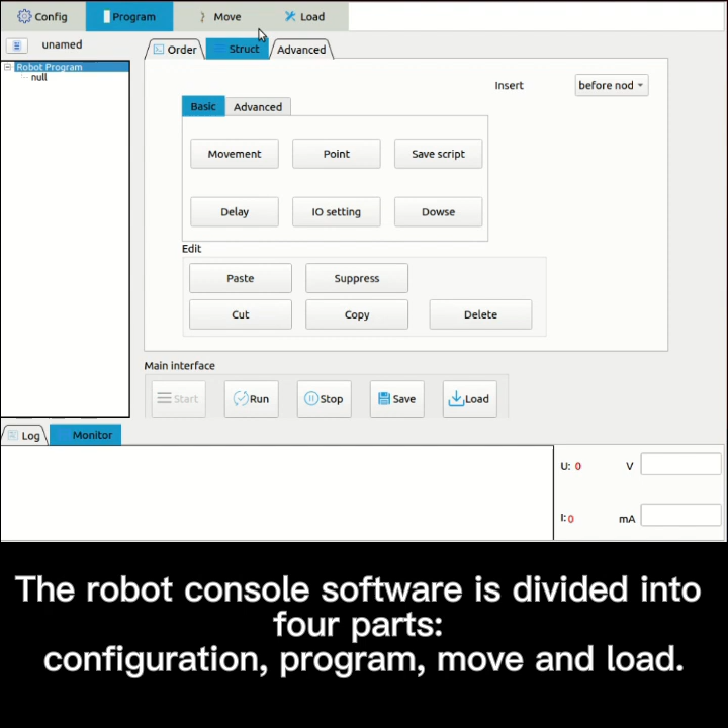The robot console software is divided into 4 parts: configuration, program, move, and load.

In the configuration part, the configuration box contains startup, developer setting, and functions. At the bottom, you can see log and monitor, and the real-time current and voltage display. This bottom part will appear in the other 3 boxes as well.

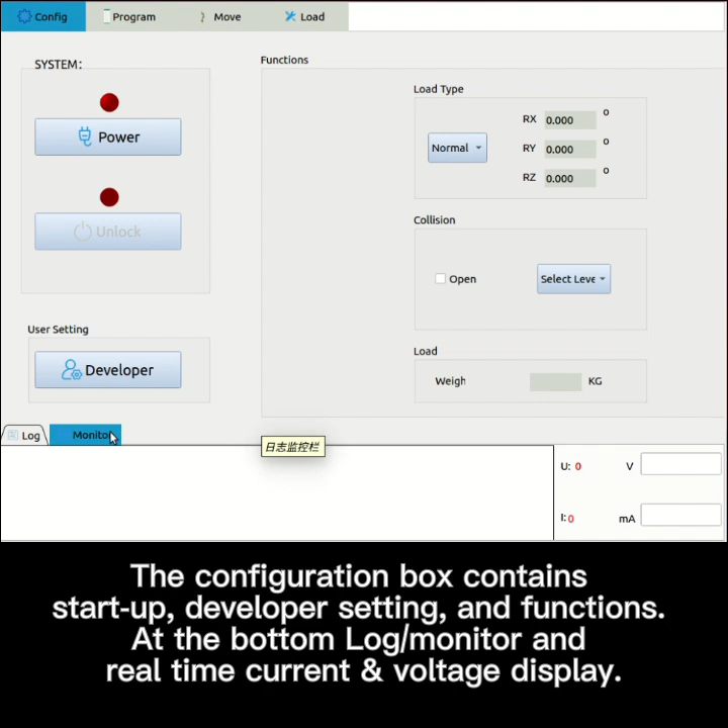To start the robot, just click power and wait until the light turns green. Then you can also see at the right the data will change, and then unlock. The robot is on when you see both lights are green.

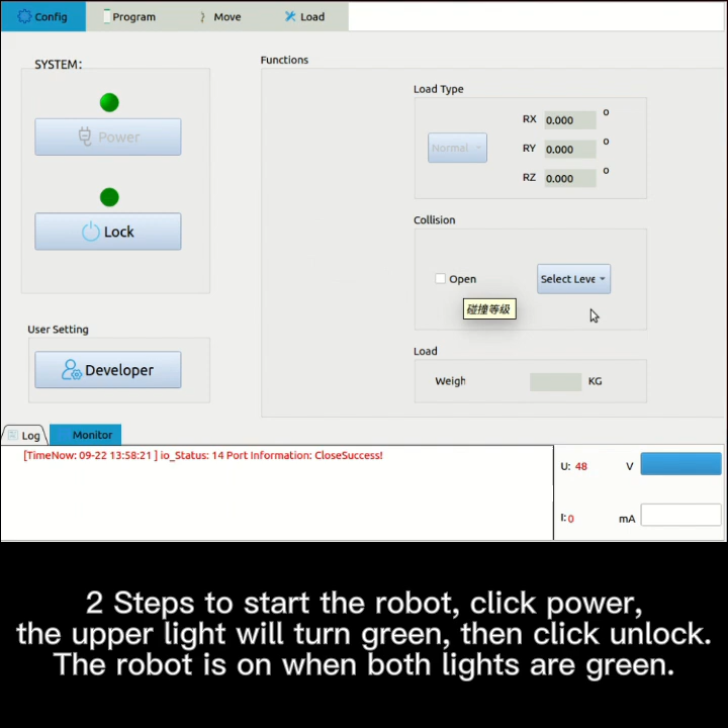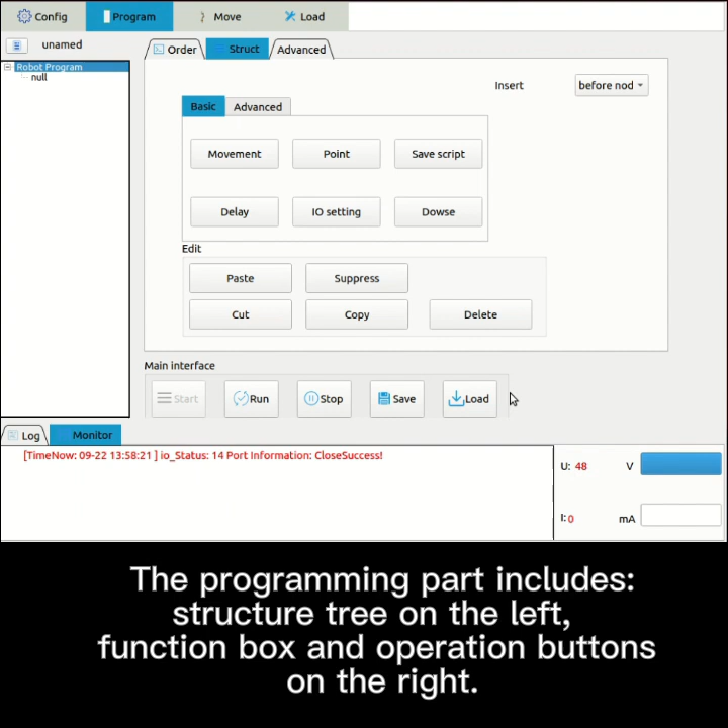The programming part includes 2 parts. The bottom part, and mainly the upper part, also divided into 3, including the structure tree on the left, the function box, and operation buttons under the function box. You can see in the function box there are order, structure, and advanced boxes. In the advanced box, you can import and run scripts and also stop or clear scripts.

If you want to program a robot joint movement, click the left part. Then go to the right part, click struct. And you will see it will turn to instruction. Only click movement, then a point will be added automatically. If you want to add more, just click joint again.

For individual programming, you can change or choose movement. There are move J, L, and P. Also, you can select the coordinate here.

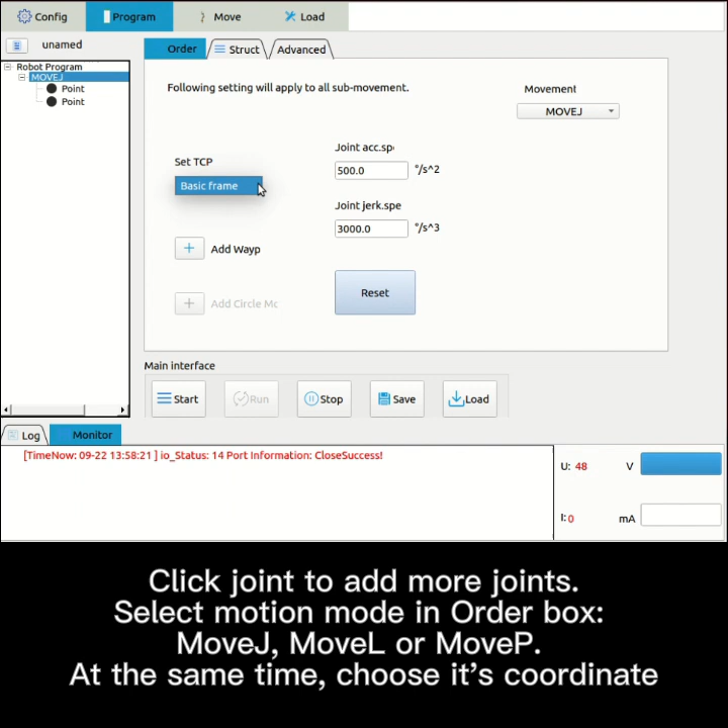Now for an individual point, select a point and choose set waypoint, and you will enter the move box. Use the arrows to program the movement of your robot. After you're done, simply click confirm, and you will save the program. Return to the program box.

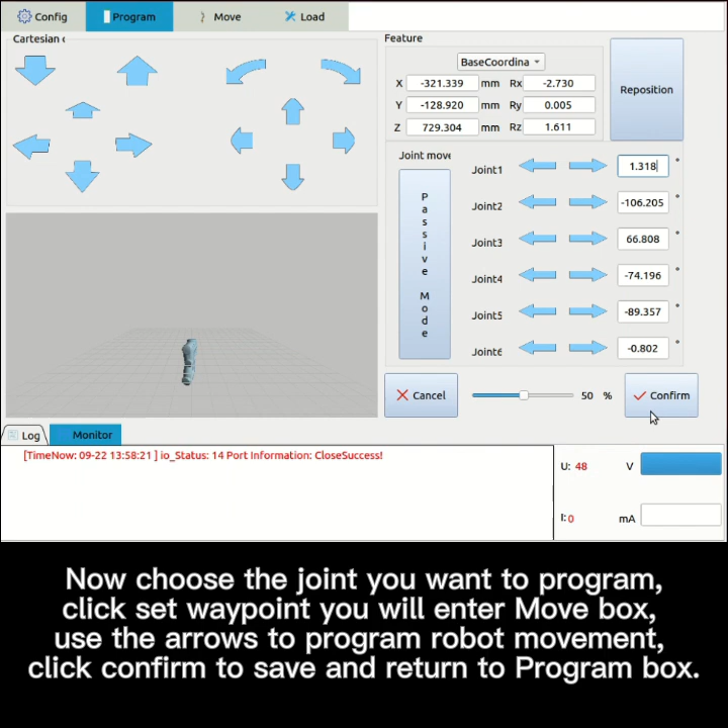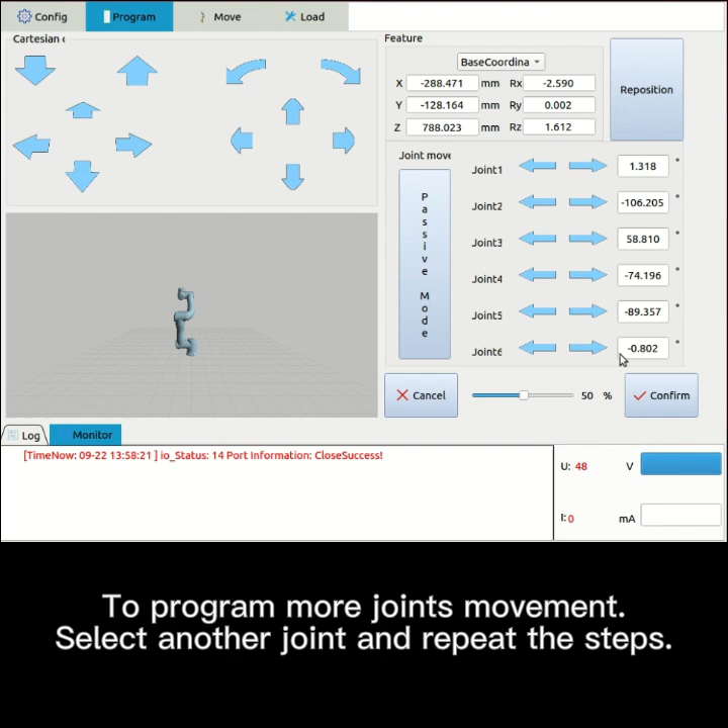To set another movement, select another joint and repeat the above steps, and also choose different arrows to change the movement. Click confirm. If you want to view the movement that you programmed, click here, move to this, tick. Go to start, click OK, then click run, choose yes.

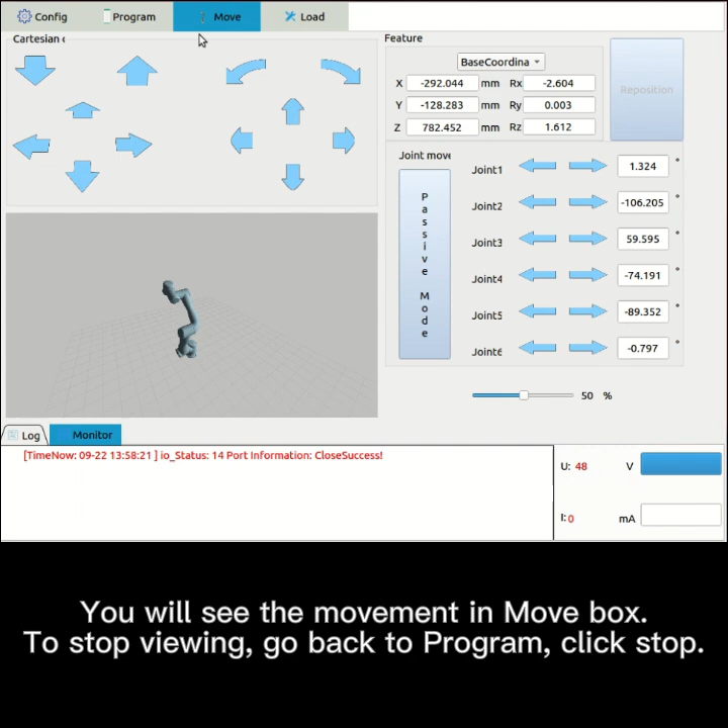Now go to move. You will see the movement in the display screen in the move box. If you want to stop the viewing, just go back to program and click stop.

Now let's take a look at the move box. It includes the Cartesian coordinate system on the upper left part, 12 arrows on the right, the reposition button, passive move, and also the speed control bar. Here is the display screen. You can see the movement of the robot arm.

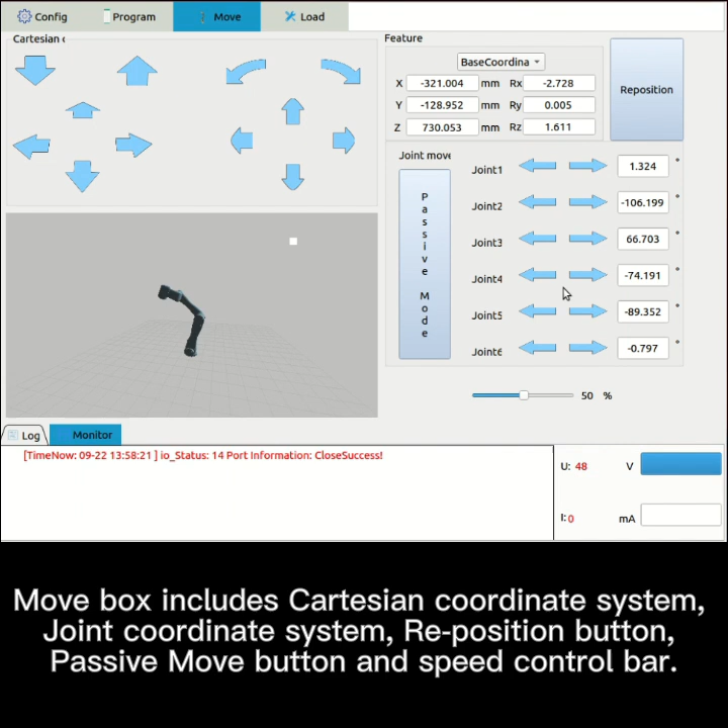Of the 12 arrows, each 2 of them control one joint of the robot arm. You can simply click and change the movement of the robot arm. And the speed bar here: the higher it goes, the faster it will be. The lower the percentage, the slower the movement will be.

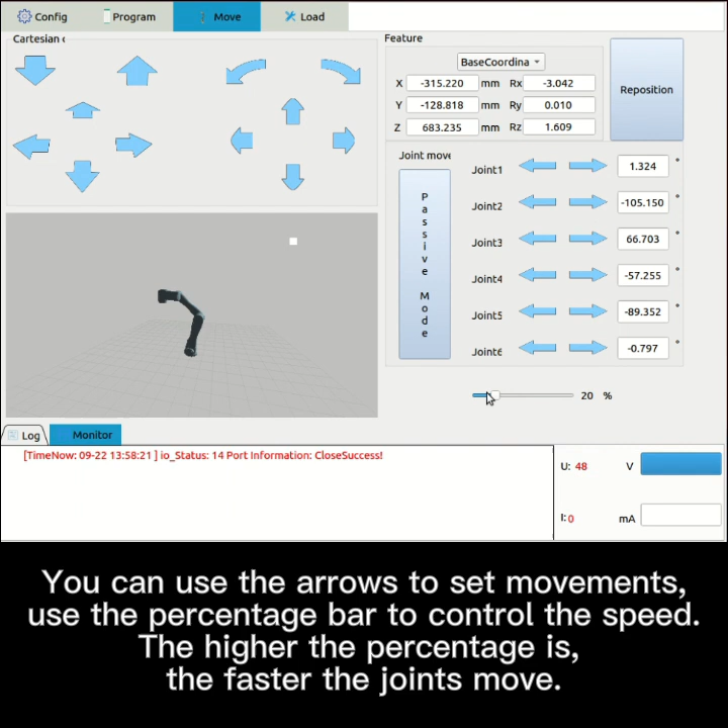On the left top part, the first 6 arrows are one group. Click different axes, X, Y, and Z, and the robot arm will move accordingly. You can see the data change as well on the right part next to the reposition button.

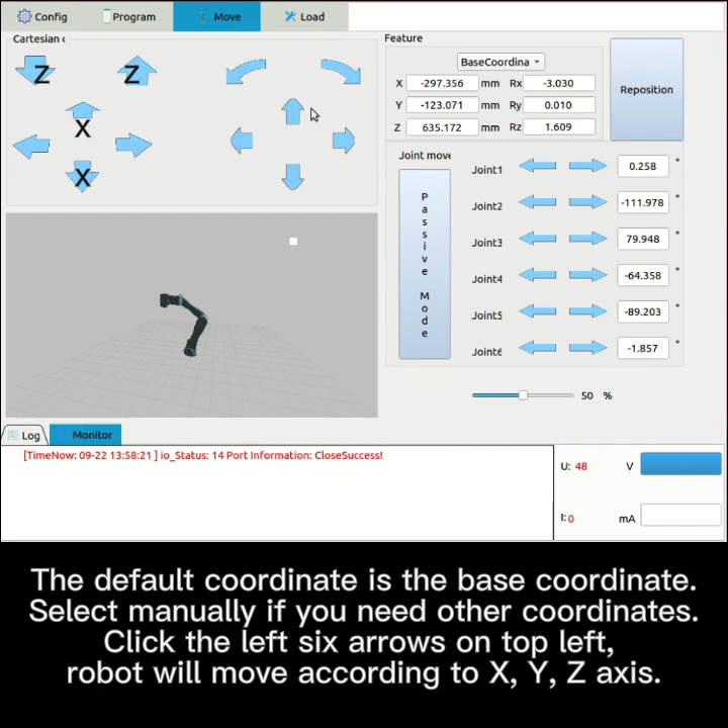And the other 6 arrows on the right are also used to control the robot arm, but if you click these 6 arrows, the robot will rotate instead of just move. It will rotate according to the coordinate.

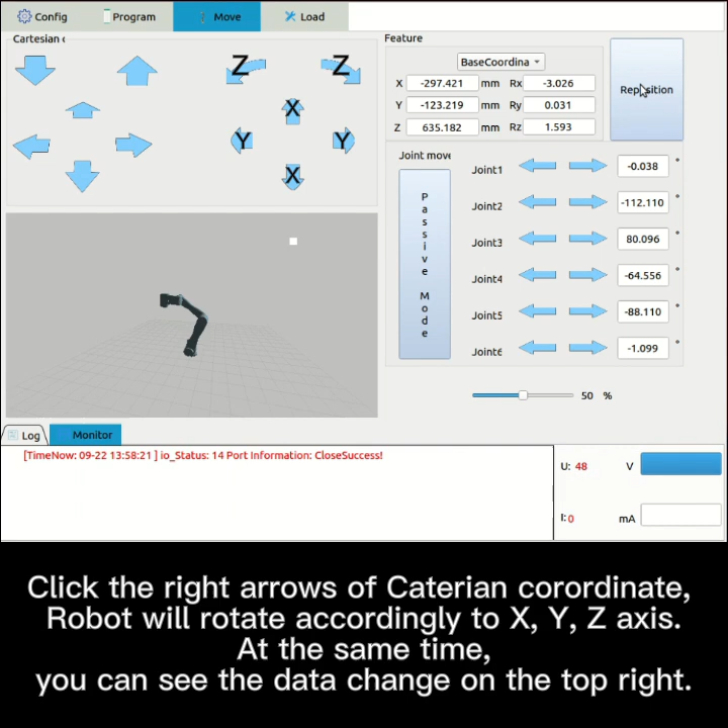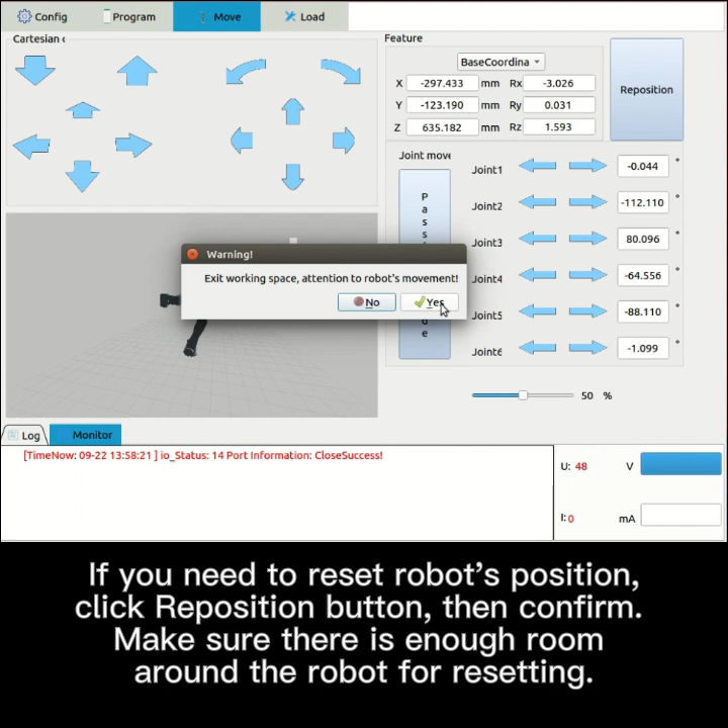And if you would like to reset the position, click reposition, choose yes. But before you do so, make sure there's enough room around the robot for setting the position back. Here we can see it's arrived.

The passive move function is for you to physically change the robot arm position, and the pathway that you move the robot will be changed and recorded as well.

The last one is load. When you need to use a TCP coordinate or add a TCP for a newly added point or joint, this is a convenient access for you.